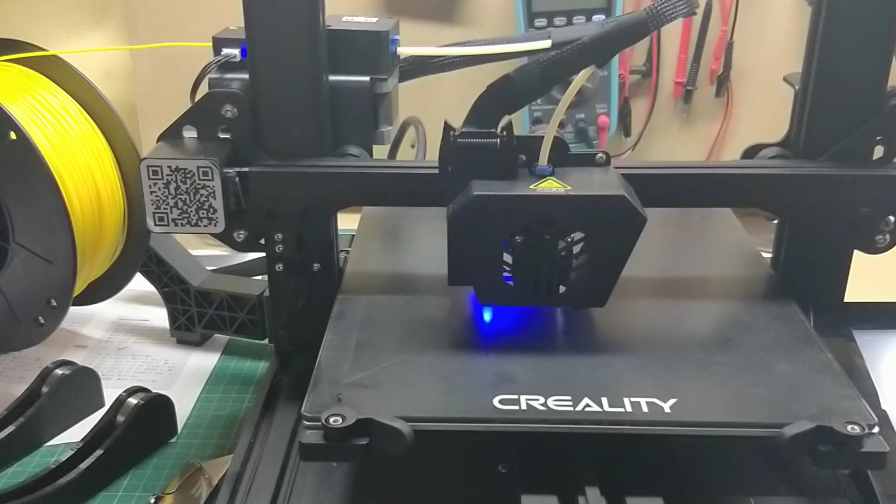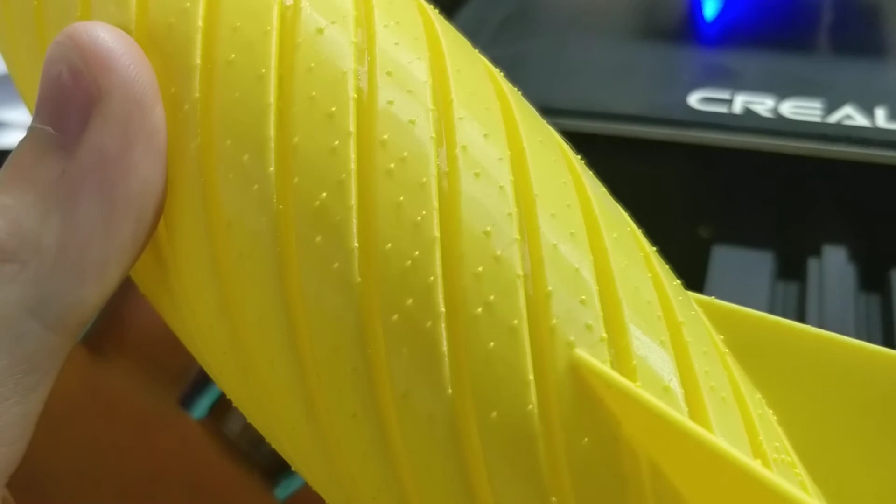Okay, so this is a follow-up video to the vase mode issue I was talking about with the Creality CR-6, where thin wall prints are coming out with this blobbing. So this is one long continuous wall, and it's got blobs of filament because the print head kept stopping.

Creality did respond to my support email about this issue, and they've said three things. One, update the firmware. Two, use the official slicing software. And number three, here's a test G-code file to print.

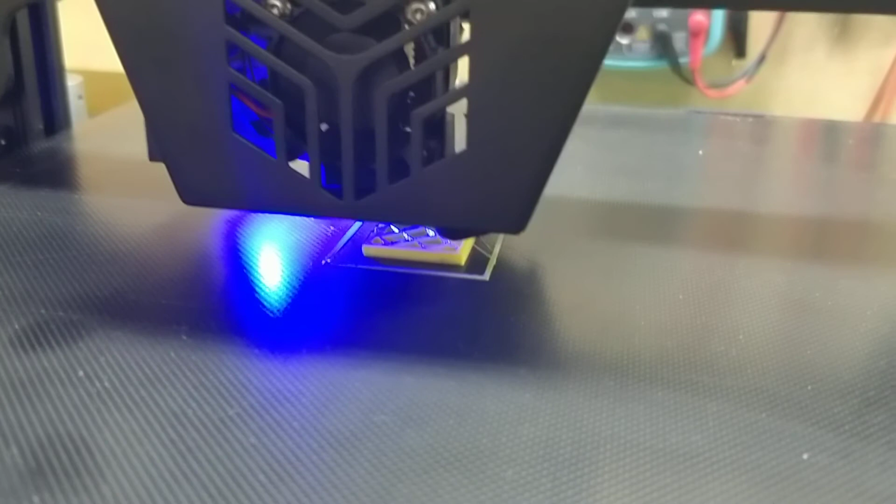I thought I'd do it in reverse because it seemed easier to do it that way. So I started out with the test print, but I don't think they fully understand the issue I was reporting, because the test file they've sent is obviously not a vase mode print. It's a solid calibration cube by the looks of it. It's definitely not a vase because it's doing infill right now. So forget the file they've sent, that's no good.

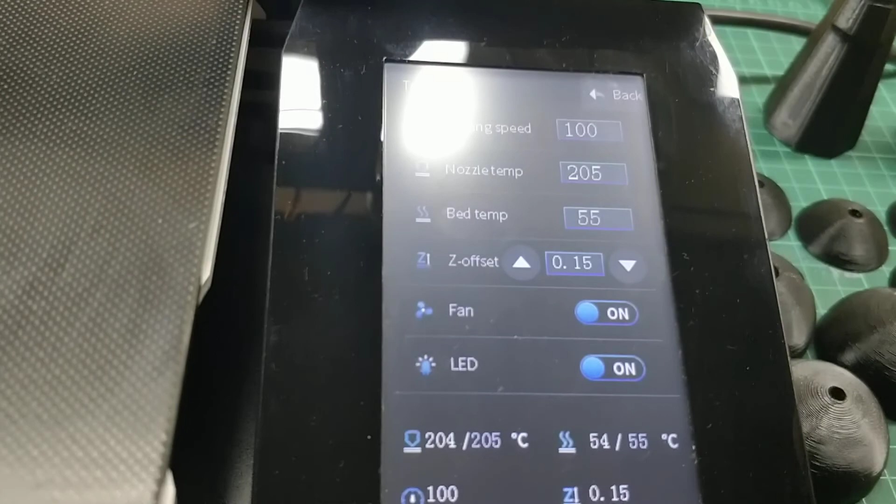What they have suggested is using the Creality software, so I'll try that next and see if that makes any difference. And then if that's still the same, maybe I'll try and update the firmware. But as far as I can tell, on these printers, it's printing now, so I probably can't. I don't think there's a way to see the settings while it's printing.

Oh, should we screw this? Let's cancel this print. We don't need another cube.

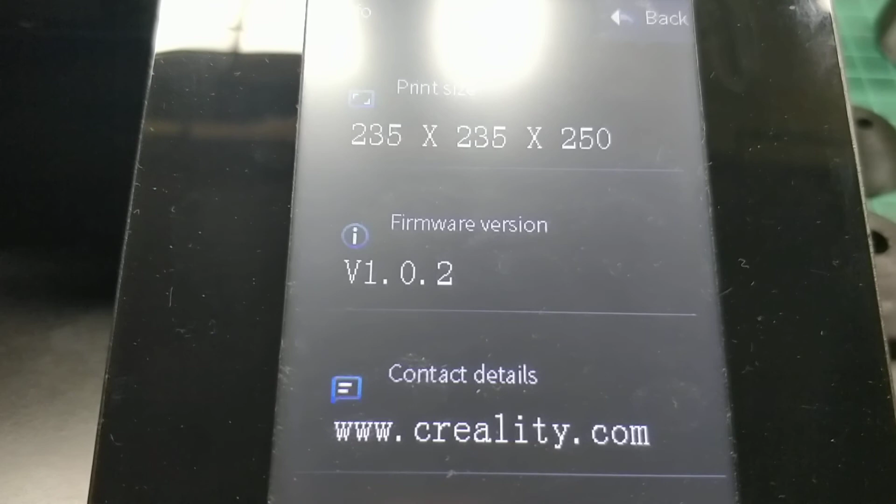So, I'm pretty sure at the time of writing this already has the up-to-date firmware version, so that's 1.0.2, which I believe is the latest version. I'll double check on Creality's website and see if there's a new one, but next step, test the Creality slicer.

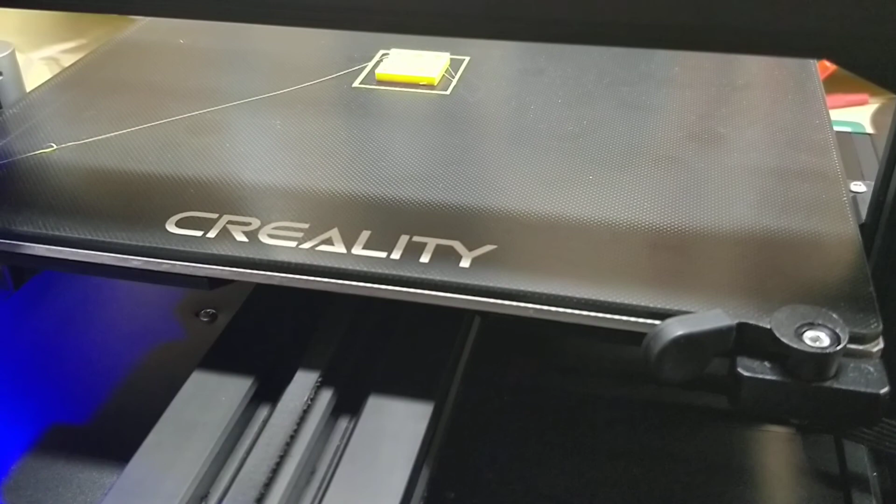Okay, so here's a fresh copy of just downloaded Creality slicer. It's all got the default settings, standard quality and so on. So let's import a STL. Let's grab my vase, wherever it was. There it is. Okay, so as you can see, it's a solid body.

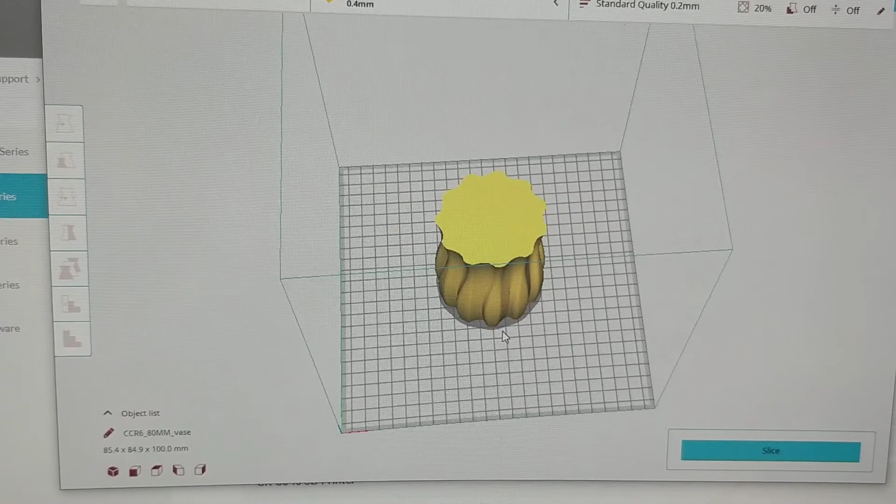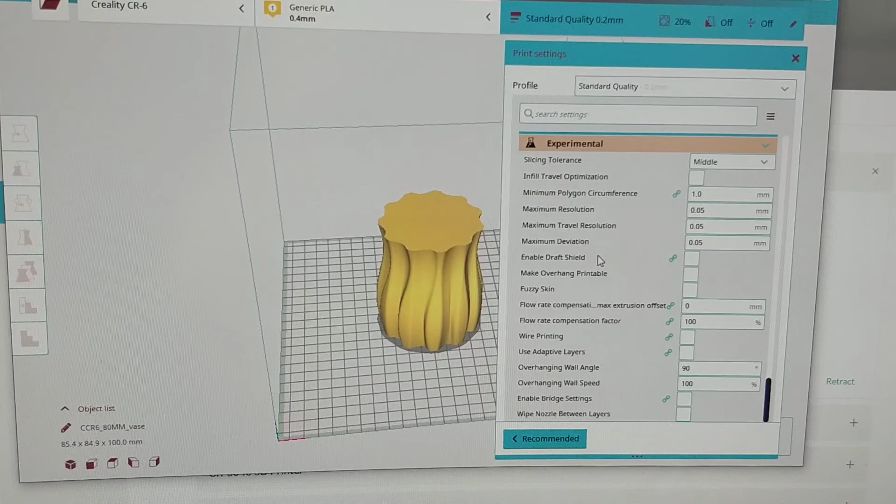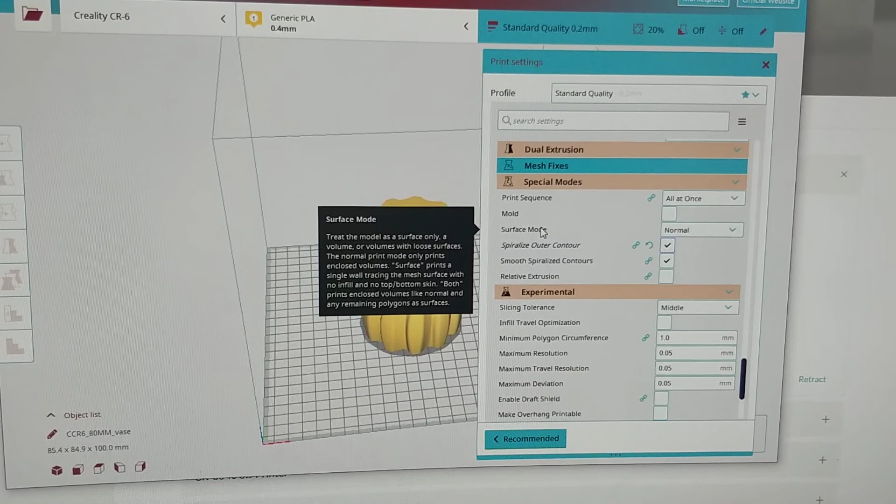So we need to change that to vase. Where is it? We want to do... where is it? I thought it was in here, special modes, is it? There we go. We do spiralize outer contour, which is what we want, and surface mode normal. Let's just, I think that's it, to be honest.

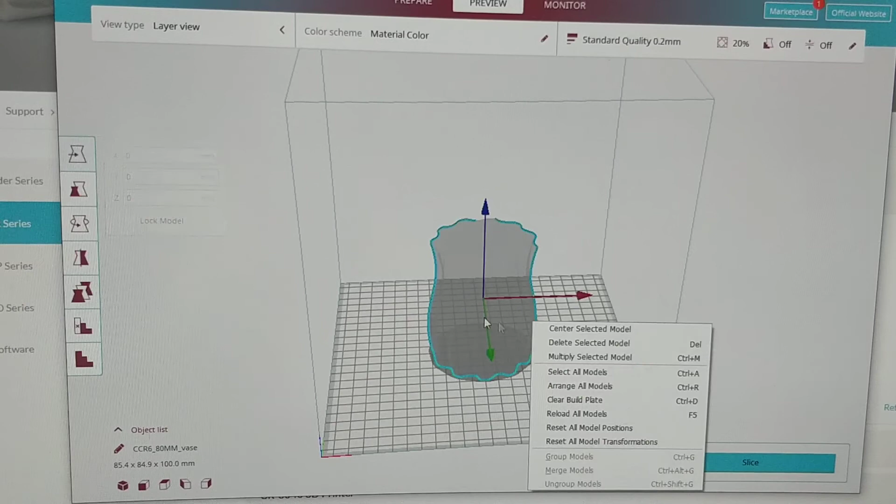Spiral mode. So let's do a slice and see what it looks like it's going to do. Preview. Yes, okay, so we're just going to have an empty body now. Let's see what... I messed it up. Let's try again.

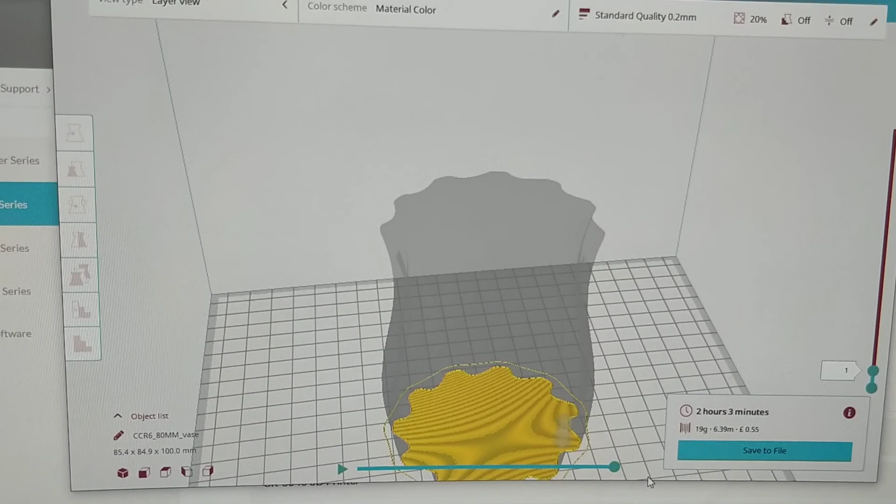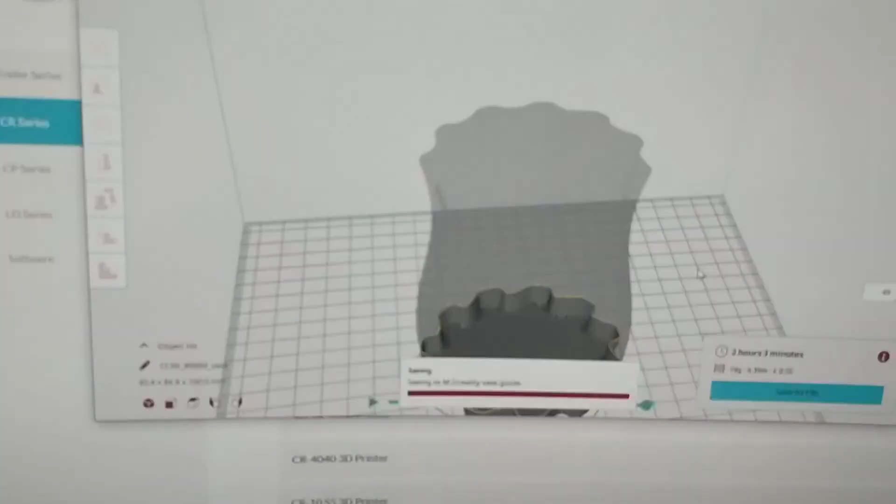So it's going to print a base and then go into the walls. Okay, let's give that a go. Save that to the SD card. Creality vase. And I'll go stick that in the printer and we'll have a look in a minute.

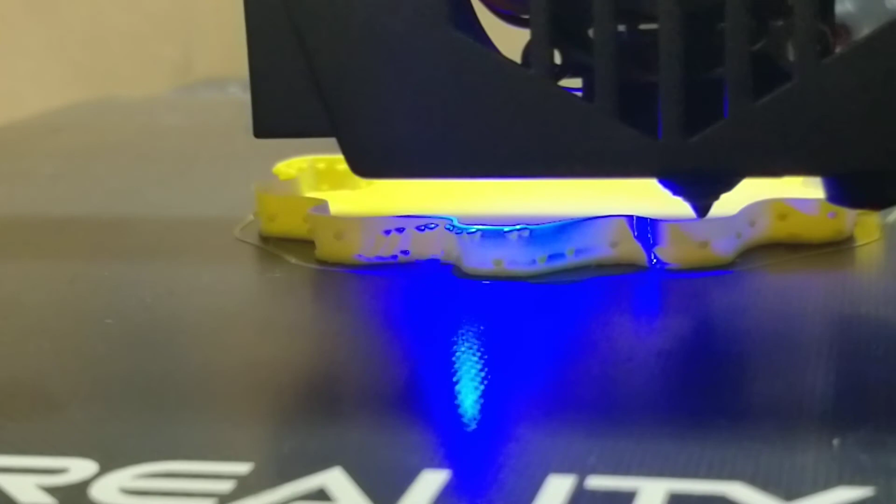Okay, so it's been printing for a while and it's all laid down the base fine, but as soon as it's got to the walls it's obviously doing the same thing, just stopping every so often. Let's have a look in there. Yeah, so Creality slicer, no good either.

The last thing to try really is the firmware, but looking on Creality's website, the latest firmware that they've got a binary for at least is 1.0.2, which is what's on my printer supposedly. There is a source code for 1.0.3, but that is source code, so I'm not familiar with the process to build it from source code to the actual bin file that the printer needs.

So, I mean, I can try flashing and just overwriting the same version. Maybe they've got the version numbers mixed up and this is slightly newer than what's on the printer. Honestly though, I don't think it will make any difference at all. So, I'll give it a go, but I'm not that hopeful.

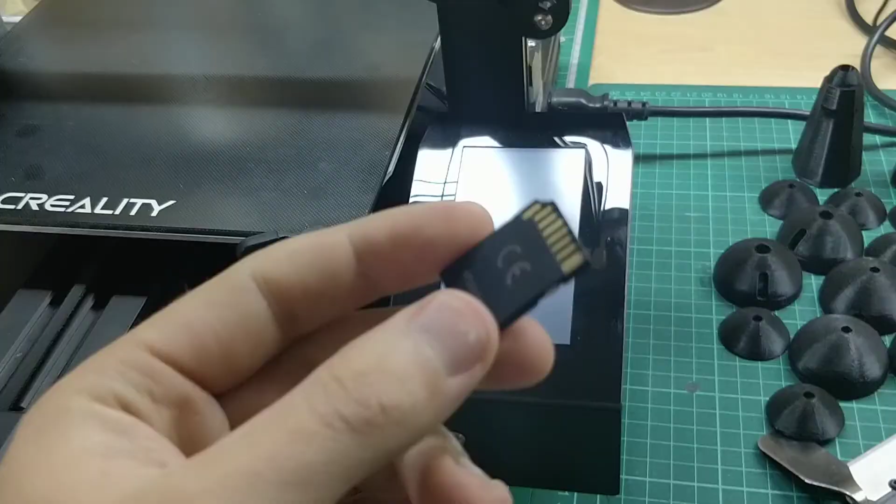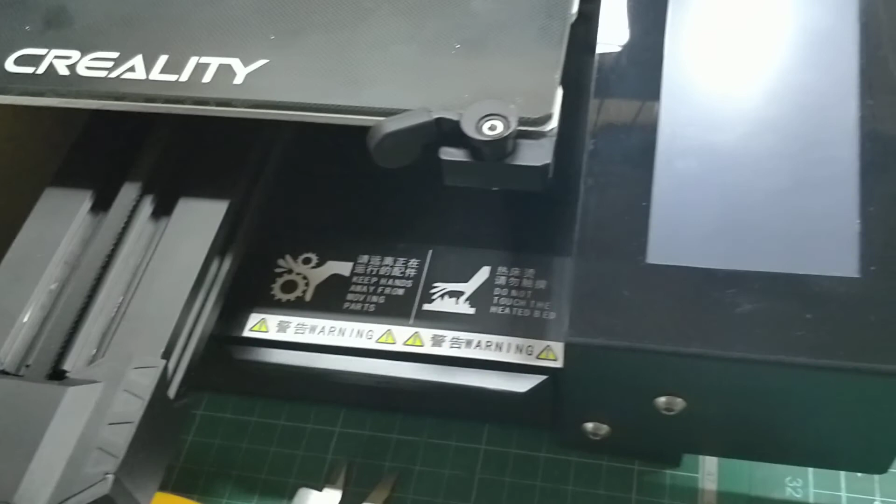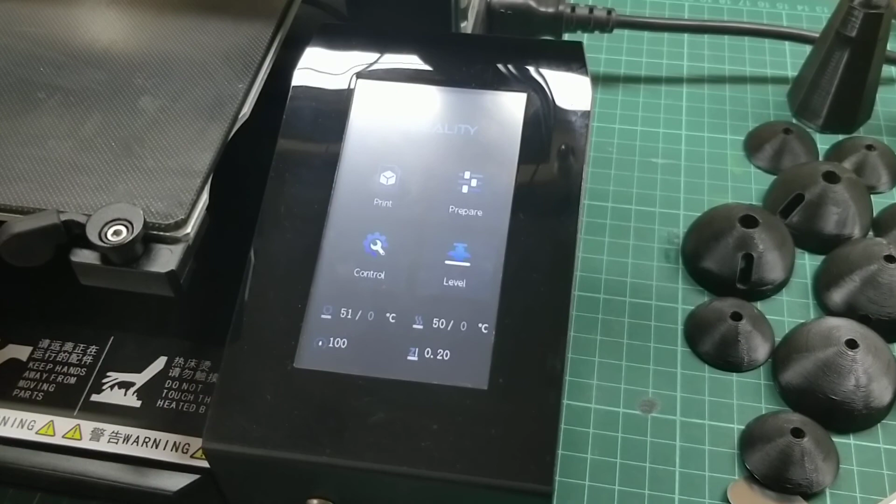Okay, freshly formatted SD card with 1.0.2 firmware. Let's see if we can get this to do an update. Well, that was all the instructions said: freshly formatted card, put the bin file on the SD card and power it up.

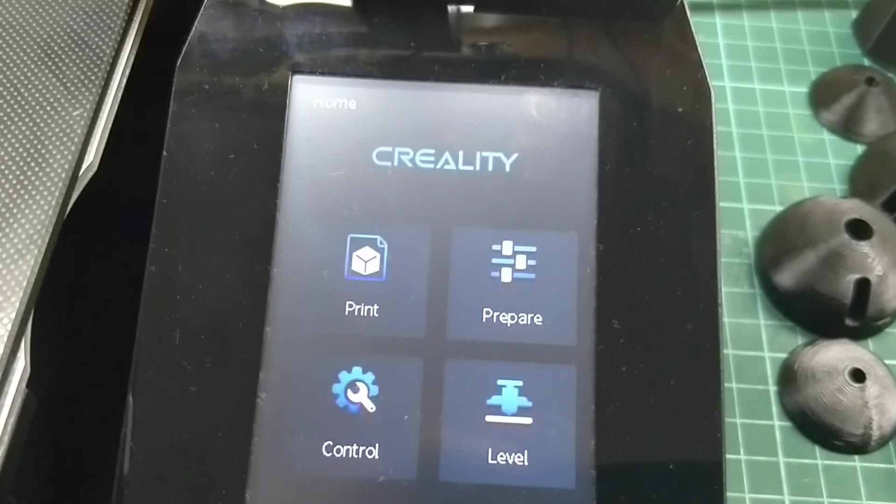That didn't seem to do anything. Perhaps because it's the same version that was installed already.

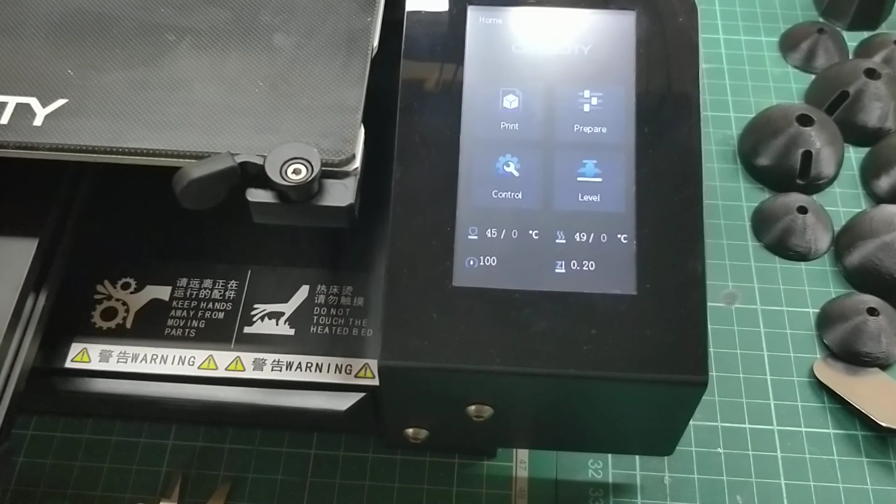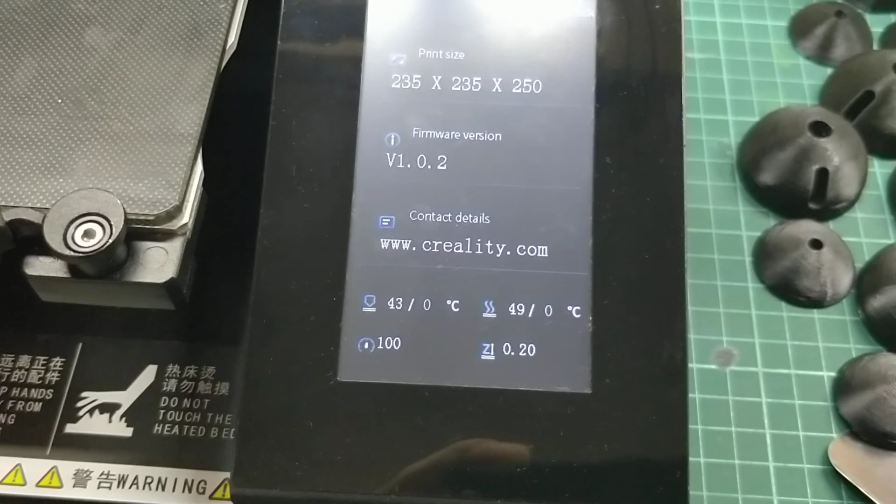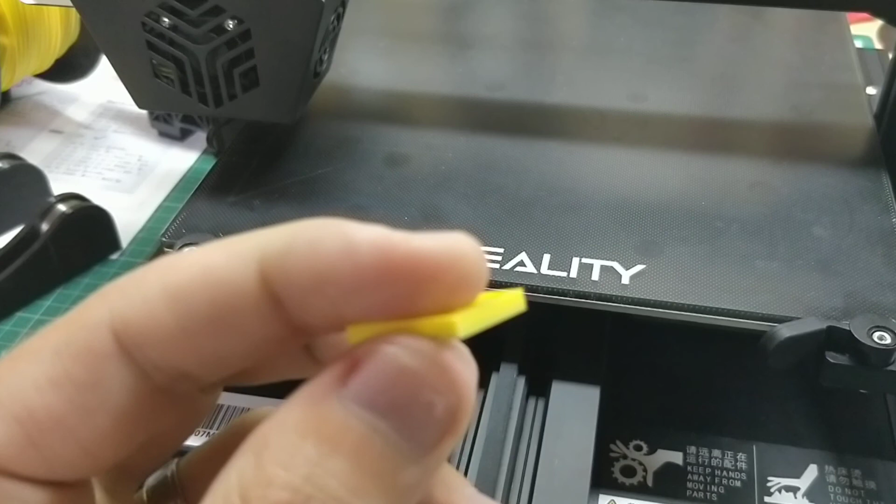Okay, well, there we go. So there's the three options. Firmware didn't help. Creality slicer didn't help. And the G-code file they sent, completely the wrong thing, definitely not a vase mode style print file. So if anyone has any G-code files that they've successfully got to work on this, I'd be really interested to find out if it works. So please do comment, link up some files.

Yeah, back to Creality with this one.